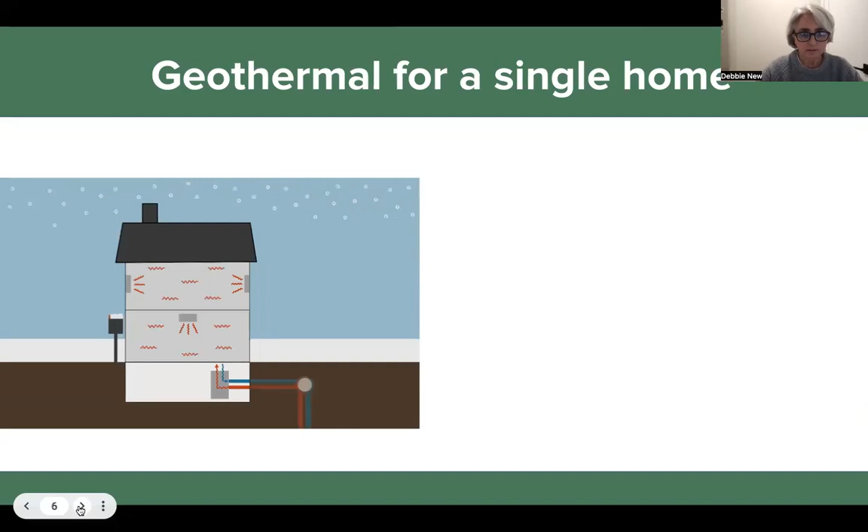When you turn on your heat, the ground source heat pump inside your house, that box in the basement, delivers warm air and extracts cold air like an air source heat pump. So there's the warm air inside the house that's coming up from underground. In the summer, the process reverses. So the heat pump delivers cooler air and extracts heat returning to the earth. All of this comes from underground at about the depth of a water well, where the Earth's temperature is a constant about 50 degrees.

So the water in vertical pipes underground absorbs that temperature and brings it up to your ground source heat pump in your basement, where it's concentrated into hot or cold air, depending on what's needed, and keeps you comfortable year round. Excess heat, meanwhile, is sent back underground where it's stored until it's needed. So it's heating, cooling, domestic hot water, and storage.

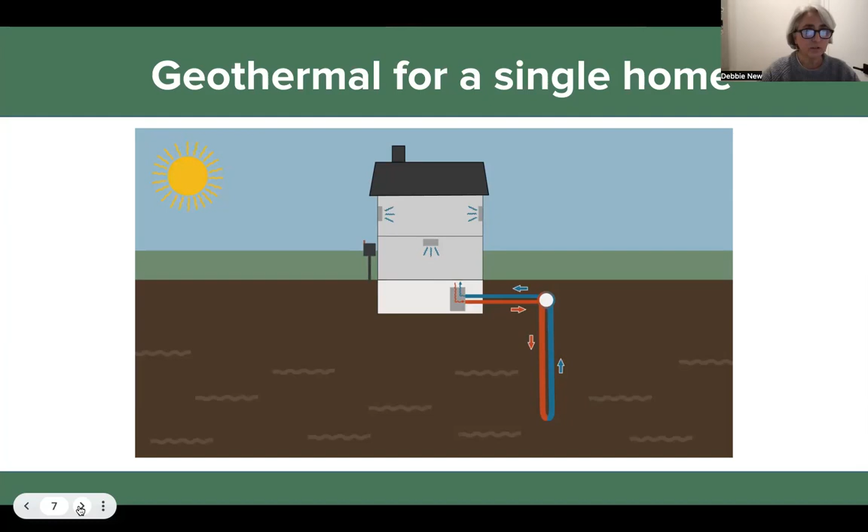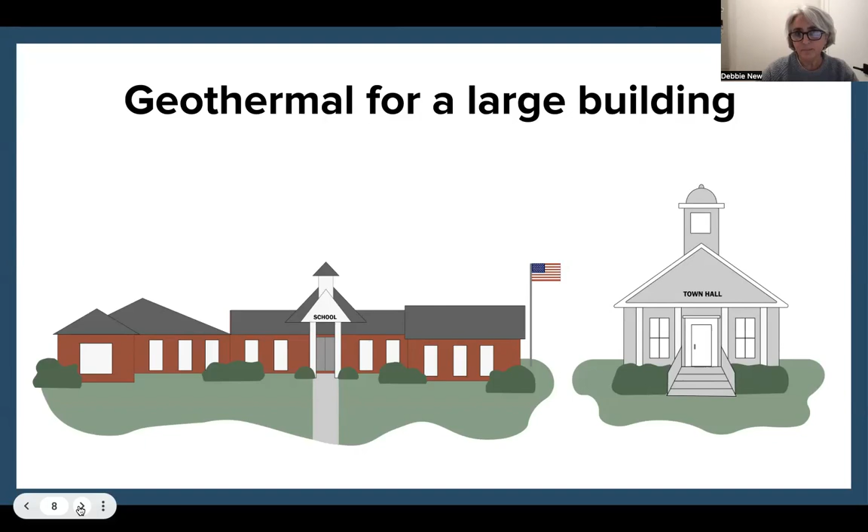Geothermal can also work well for larger buildings, especially because it's very reliable and low maintenance. Especially for municipal buildings like schools, town halls, libraries. It's a great solution. And it can be an anchor for building a network out from one building and spreading that to other buildings nearby. It's also an important alternative to biomass. So we can come back to that maybe around some questions about it.

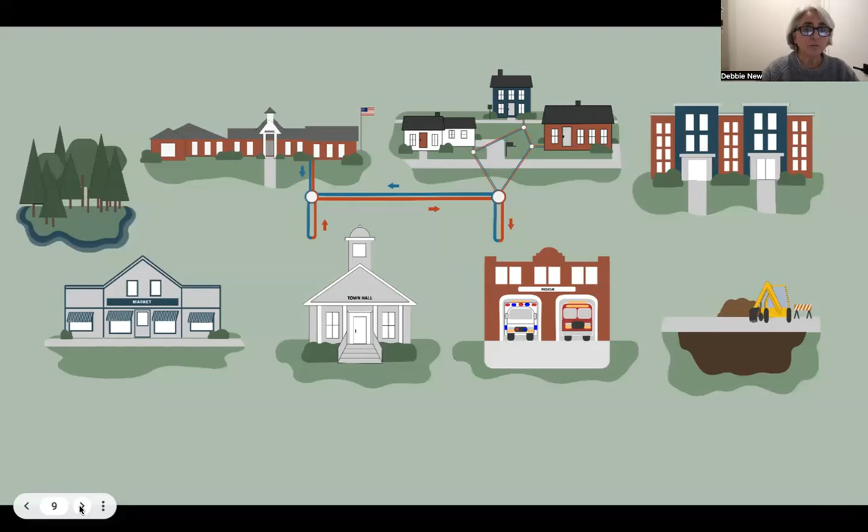A network system is even more efficient than geothermal for a single building. So buildings are connected to vertical bores, as I mentioned, and they're linked by horizontal pipes that form closed loops that exchange temperature with the earth and share it between buildings. So homes and large buildings and different kinds of facilities like the ones you see here, this is based on some buildings around Waitsfield, where my daughter who made this illustration grew up. So that's her elementary school.

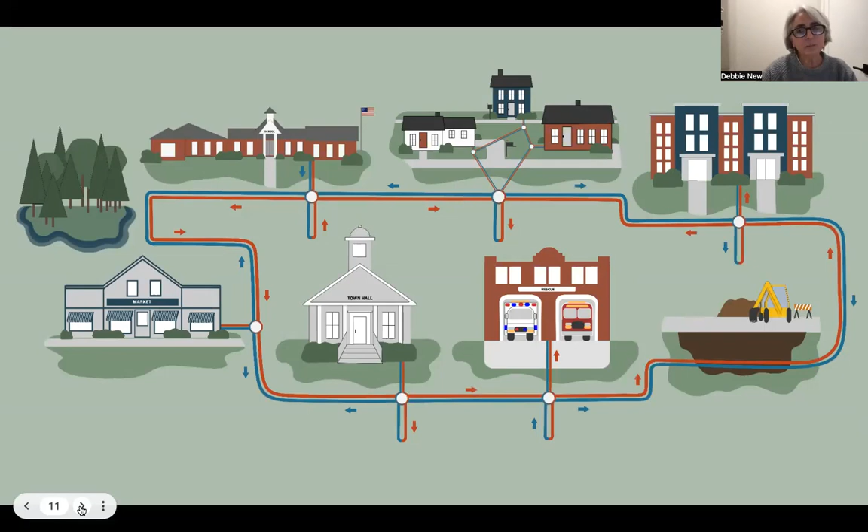So they often have different thermal needs at different times. So excess heating or cooling isn't wasted. It's not vented out of the buildings or flushed down the drain. It's shared efficiently between them. And these loops can grow over time, becoming even more affordable and more efficient as they grow. But it's important to mention that we don't have to do a network all at once. We can start small and build from there.

So this is one of my favorite parts of talking about this because there's a long list of benefits. And these are some of them. So I'm just going to run through this quickly. These networks, because they don't involve fossil fuels, are safe and clean. There's mainly water inside the pipes and nothing is burned. So there's no risk of explosions or toxic leaks. And the only emissions come from the electricity needed to run the pumps.

They're also affordable and reliable. Once installed, customer bills can be low and predictable year-round. And we'll talk later about affording that upfront cost and how even that can be spread out over time and over a community to make it actually doable. These systems are also healthy. As I said, nothing's burned inside, so the indoor air is safer to breathe.

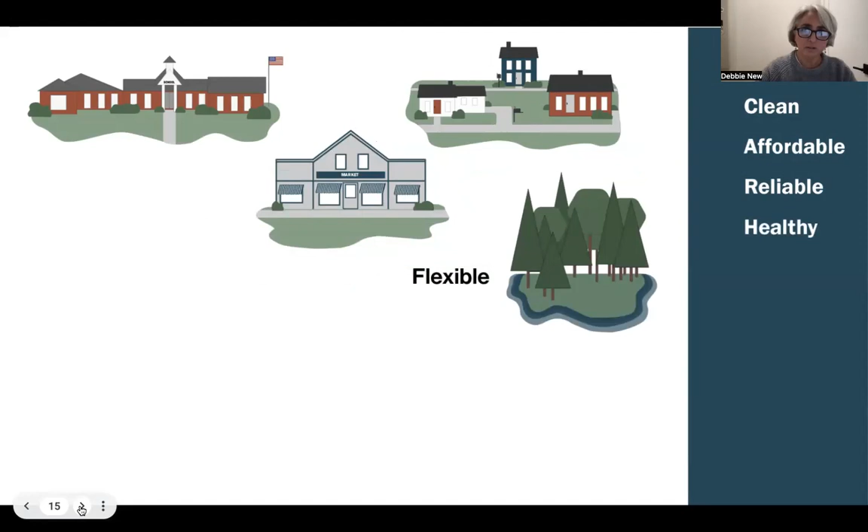And they're flexible, which is really important in Vermont because we live here because of the natural landscape. These systems can fit into that landscape in many locations with a minimal footprint. So the aesthetics of these systems is not such a big deal. They're also resilient and secure. The components are durable, long-lasting, and they're mainly underground or inside, so they're protected from a lot of different kinds of disruptions.

They're also equitable because these networks offer a community scale solution rather than an individual choice based on what people can afford or what they can access. And it's not house by house. So we can move faster to bring clean energy to more people across a neighborhood.

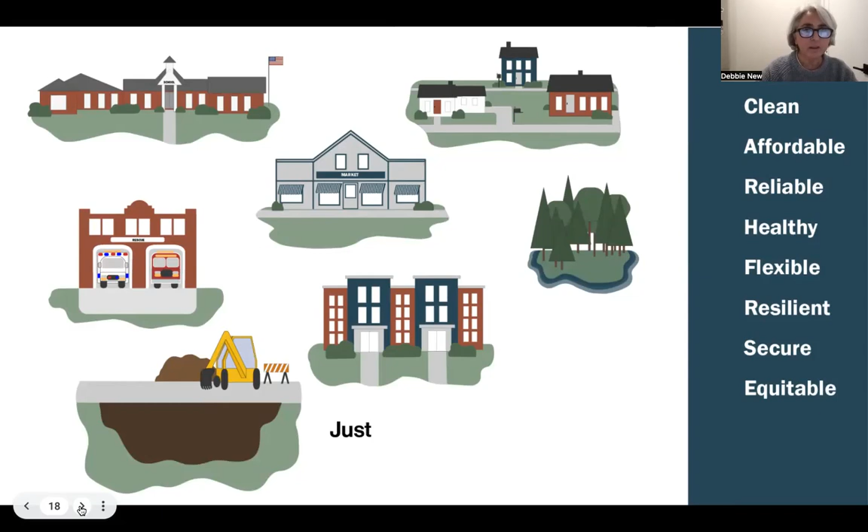They can also be part of a just transition because fossil fuel workers, whether they work on the gas system or they deliver oil and propane, they're plumbers and pipe fitters, and they understand pipes underground and delivering fuel. So they can use the skills they already have to install these systems. In fact, one of the national trainers who came to Vermont to work with the workforce at Vermont Gas Systems, really by training them, found that their skills were almost identical to what's needed to install a ground source heat pump loop.

And importantly, these are local systems. The energy comes from underground, under our feet, and around us in our communities. So we're not beholden to international energy markets and fluctuating prices, but it's right here, and it's a system that we can actually own and operate.

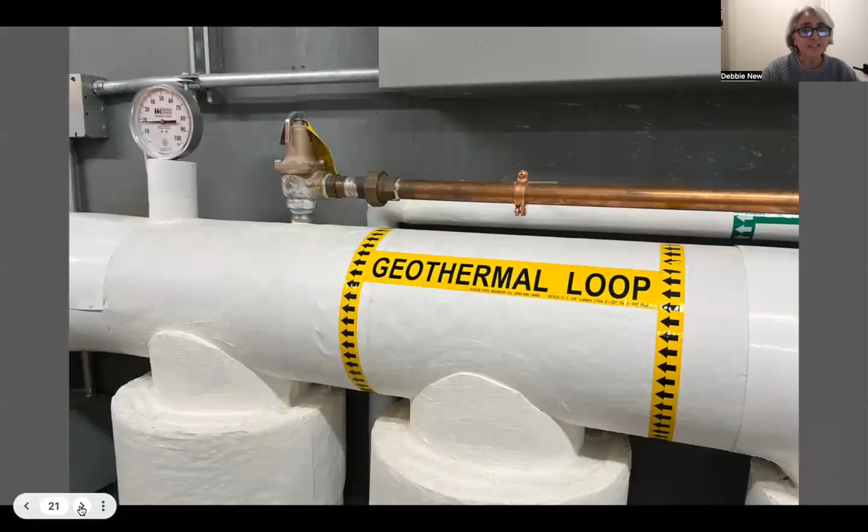So I want to show you some examples of what this looks like. This is a geothermal system up in Burlington at Hula Lakeside, and it's a larger system. It connects a couple of buildings. So this is a larger pipe than you might find in some places, but this is part of a geothermal loop.

So I also want to talk through some non-Vermont examples, because these systems have been operating for a bit longer and we've learned things about them that relate to what we need to know here. In Toronto, there is a new development that's been operating for about 2 years, of over 300 homes that are all connected through geothermal pipes. And they are expecting to reduce their emissions overall over time, once the whole thing is operational, by about 80%. 80% reduction in emissions.

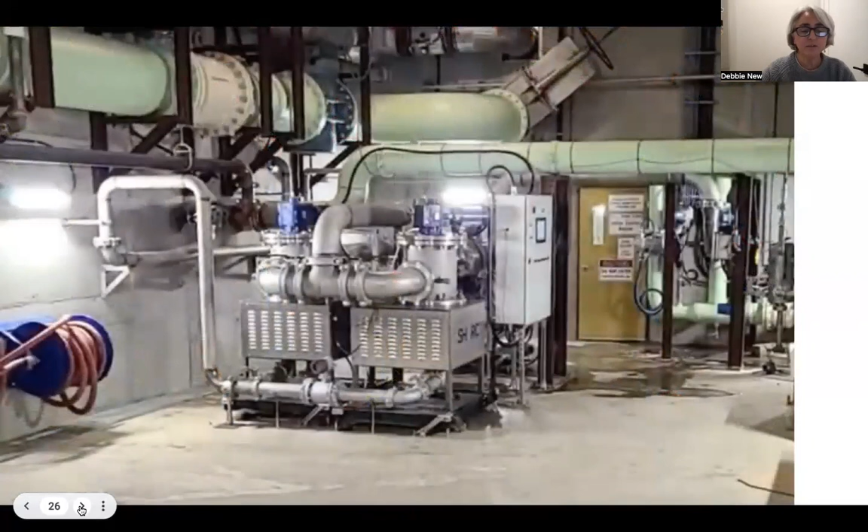An ice rink in Vancouver provides heat and hot water to nearby buildings, about the equivalent of 43 homes from one ice rink, by sharing heat that's removed during the freezing process to make the ice. And another neighborhood in Vancouver is cutting greenhouse gas emissions from buildings in half by recovering heat from a wastewater treatment plant. And this mechanism in the middle is what is extracting the heat from those wastewater light green pipes and delivering it to nearby facilities, nearby homes.

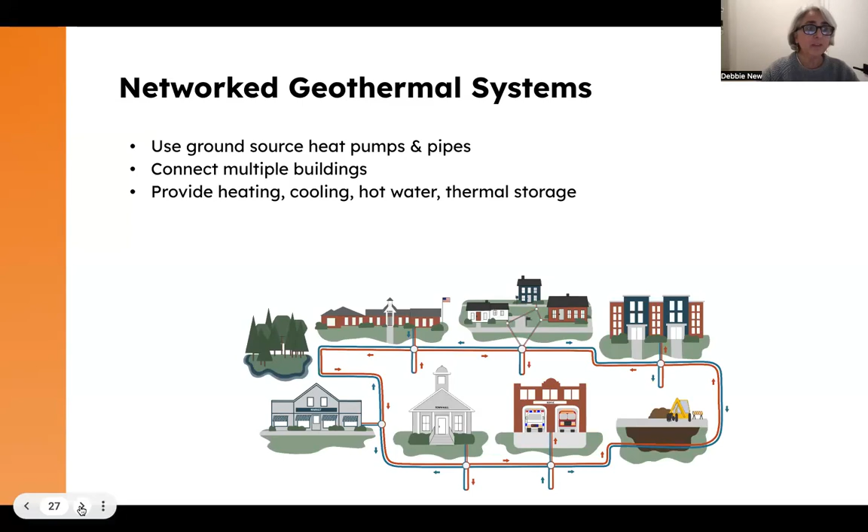So to recap, networked geothermal systems use ground source heat pumps and pipes to connect multiple buildings and provide heating, cooling, hot water, and thermal storage, importantly, for consistency. In addition, thermal energy networks do all of this, and they harness waste heat that already exists across a community, that's otherwise vented or lost, and that has already been generated and already paid for.

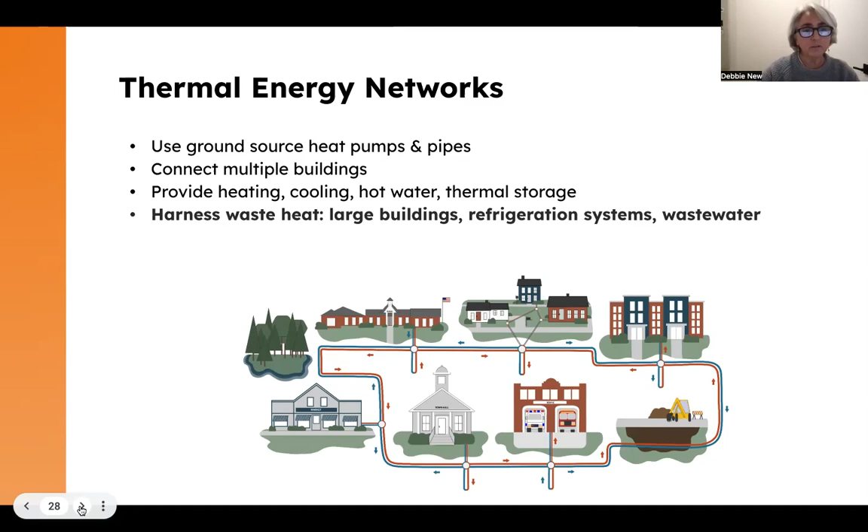So, for example, the waste heat from a large grocery store's refrigeration system can be reused to provide heat and hot water to about 15 to 30 homes. So combining geothermal with other thermal resources creates a stronger solution. And that's why I'm mainly talking about thermal energy networks and helping people understand that geothermal can be part of it, but really our goal is thermal energy networks of different kinds in different places.

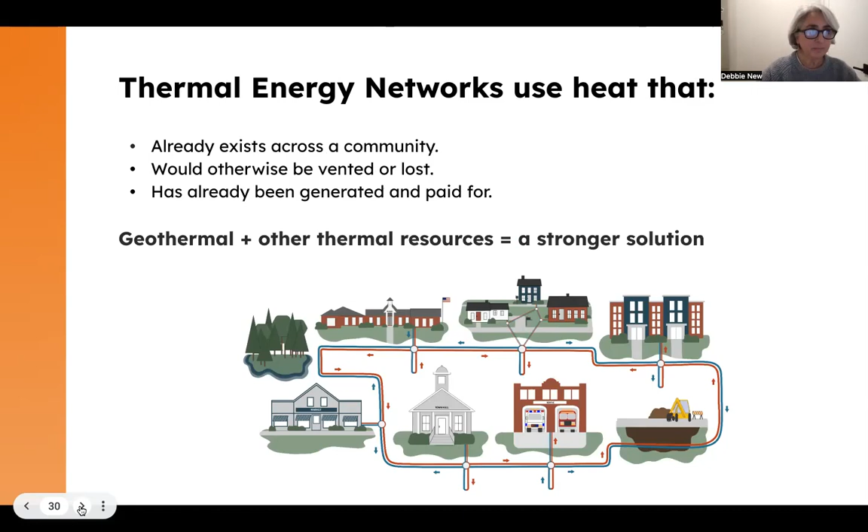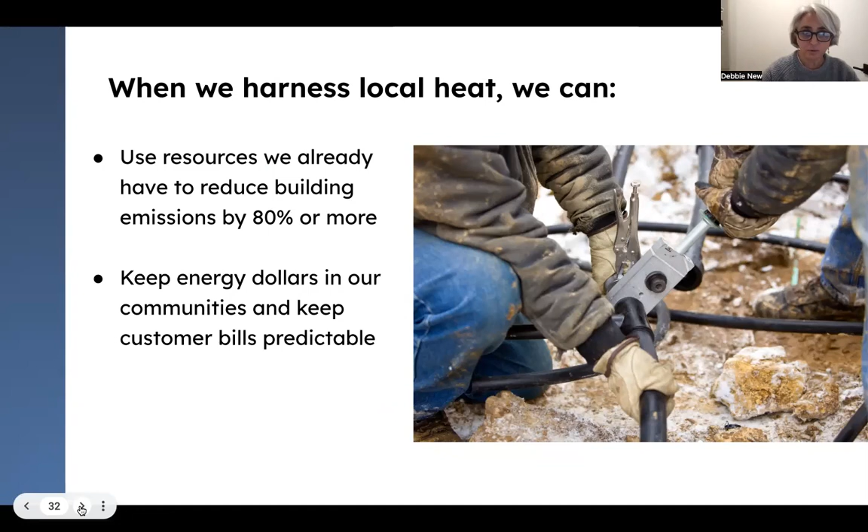So by building thermal energy networks in town centers where we have the density and proximity, and in new construction where it makes total sense, we are harnessing local heat and can use the resources we already have to reduce building emissions hugely, by approximately 80% or more. We can also keep energy dollars in our communities and keep customer bills predictable. And we can protect the electric grid as we accelerate the energy transition.

So because TENs are so efficient to operate, the ground source heat pumps are using more moderate temperatures to create heating and cooling than an air source heat pump does on the very hottest or the very coldest days. Because they operate more efficiently, regardless of outside temperatures, they use less electricity, and the components last longer than other kinds of heat pumps. 25 years or more for the ground source heat pump, and a loop, the underground pipes, can last 50 years or more.

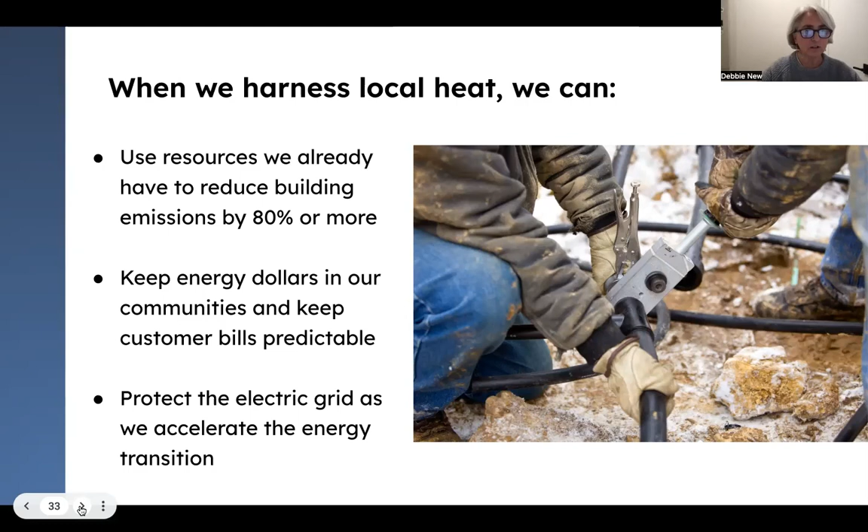So we can protect the electric grid by implementing this solution. We can decarbonize buildings without added grid load, making electrification go further, faster by reducing the demand from the thermal sector. So I want to emphasize this point, that thermal energy networks are a yes and solution. And what I mean by that is they're part of a portfolio of solutions that complement other clean energy solutions.

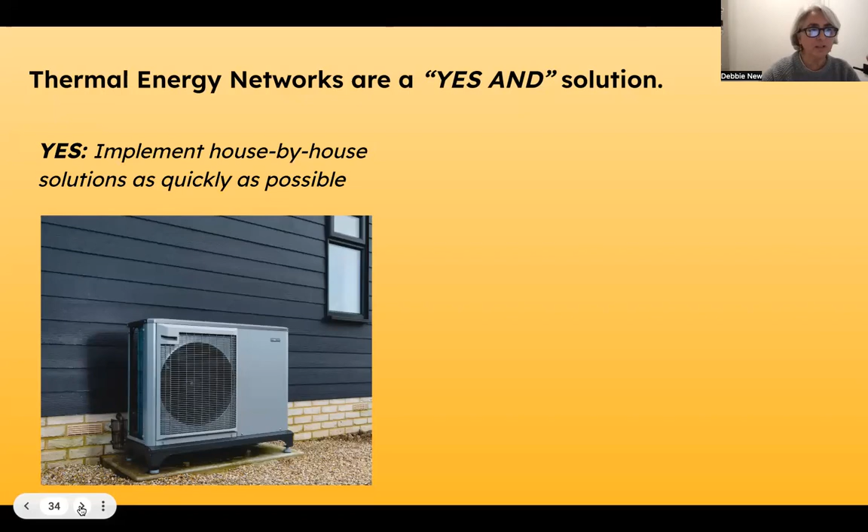So the yes part is that we need to implement house-by-house solutions like air source heat pumps as quickly as possible. We also can add thermal energy networks in new developments in town centers to help more people access and afford clean energy, and to add another way to heat and cool our homes, so mitigate risk by diversifying our thermal energy sources. And as I mentioned with the Texas development, we can pair systems with solar to supply local clean electricity needed to run the system, and it's essentially a mini grid.

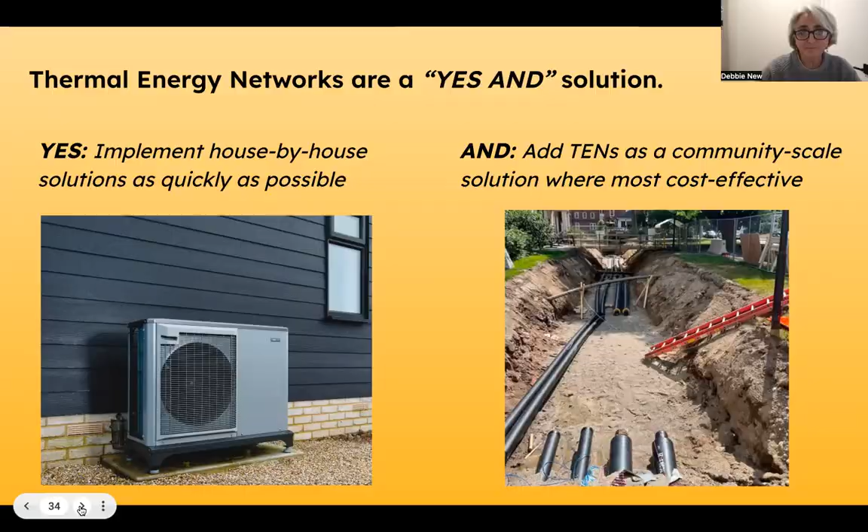So I have one more example for you, and this is from Colorado, where they're really moving forward with thermal energy networks. Colorado Mesa University was one of the first systems to really get going with networked geothermal, and they've been operating for over 12 years. And we have some really good data on what's going on there. So at this campus, they're heating and cooling 16 buildings and getting 90% of the energy required to operate their campus from this thermal network.

So let's come back to Vermont. I've recently talked with the director of a municipal utility, a water and electric department in a small Vermont town. And he knows Vermont. He's been around for a while, and he's identified 4 themes that he hears a lot, and he calls them myths.

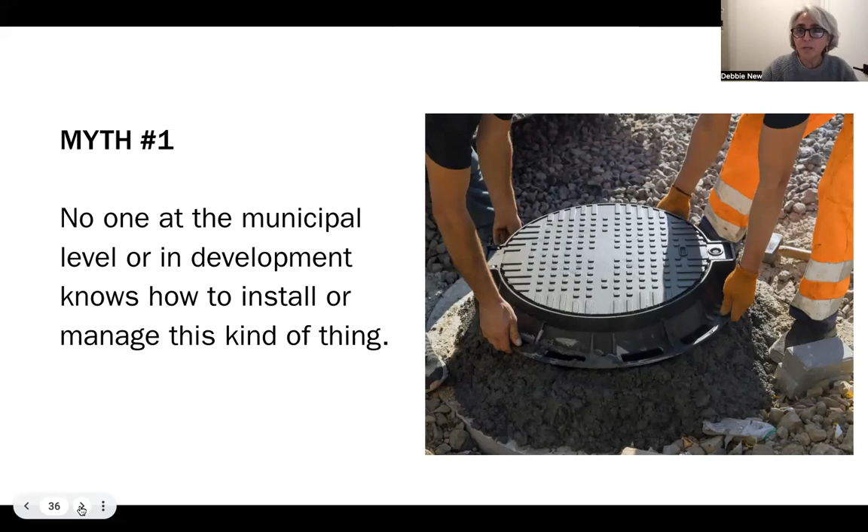So myth number 1, no one at the municipal level or in development knows how to install or manage this kind of thing. Well, actually, municipalities know how to lay pipes and manage energy flows. They know how to raise capital for larger projects and pay them back over time. So we already have a lot of what's needed. And the other point here is that thermal is actionable. It's within local and regional control, whereas the build out of the electric grid really is not in our hands, but we can harness and use local heat.

Myth number 2, thermal networks have to be big. Well, actually, they don't. They can be just 2 buildings sharing heat, like an ice arena near a high school, which is an actual project people are looking at in White River Junction, a hospital and adjacent senior housing complex, or a telecommunications facility next to a hotel.

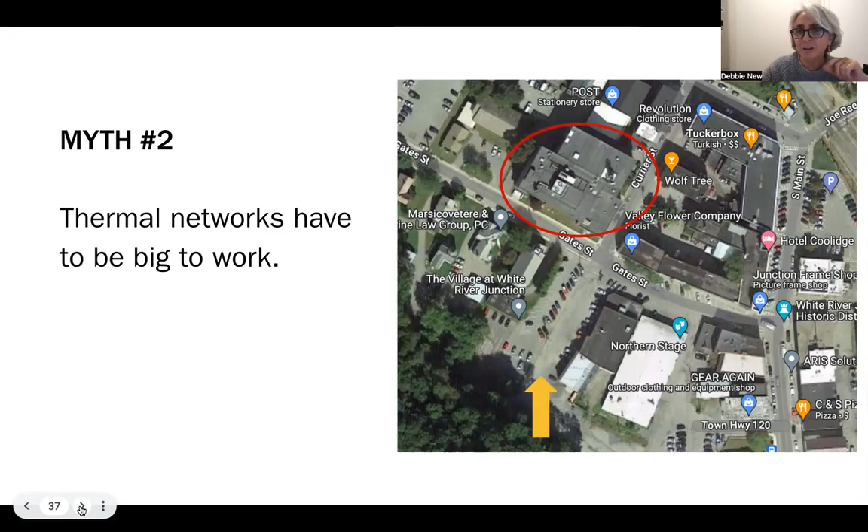And here is that telecommunications facility in a Vermont town. And if you start there and you connect it to the senior housing development that is across the street, that is occupying that parking lot that used to be there, and then you can add the theater and other buildings nearby over time.

Myth number 3, we can electrify everything. Well, I imagine people here are aware of the problems with that. In Vermont, some of the municipal utilities have told me that they will need to build the electric grid out 2.5 times the size it is now in order to meet the demands of electrifying everything. That's a big cost, and that's a big effort. Instead, we need to diversify our energy sources and use local heat where we can, so we can use electricity for what we really need to use it for.

Over the next 10 to 17 years, we need to eliminate the use of about 9 million gallons of oil and propane per year, which just gives more strength to our mission to get thermal energy networks in Vermont where they make sense and where we can get them built.

So what do we need to do in order to do this? Well, we need the workforce. Like all clean energy solutions, we need people to actually put them in. And that's a challenge in Vermont because you can't just have the workforce without being able to house people. So there are many layered issues there.

And we are talking with Vermont Technical Centers. We are talking with Vermont Technical College. And we are also working with other people who are highly focused on the workforce situation. So I'm only touching on that this evening. We could talk about that more. I'd like to talk more about financing and policy.

So financing, there are 2 main levels to this. On the federal level, as I imagine people here know, there are unprecedented levels of federal funding for clean energy. One thing about thermal energy networks is that we can maximize the Inflation Reduction Act. 30% tax incentives for these systems with a potential 10% more for domestic manufacture, which these systems mostly are. So then you can add on other things like low-income housing and other ways to harness the federal dollars.

So in Vermont, we can optimize the utility model. So we can have existing utilities and municipal and other utilities implement these systems because they can access the upfront capital and spread out the cost to recover it in rates over time. The Vermont Bond Bank and Vermont Economic Development Authority are part of our team. They're up to speed on this and they're ready for projects to create financing for it.

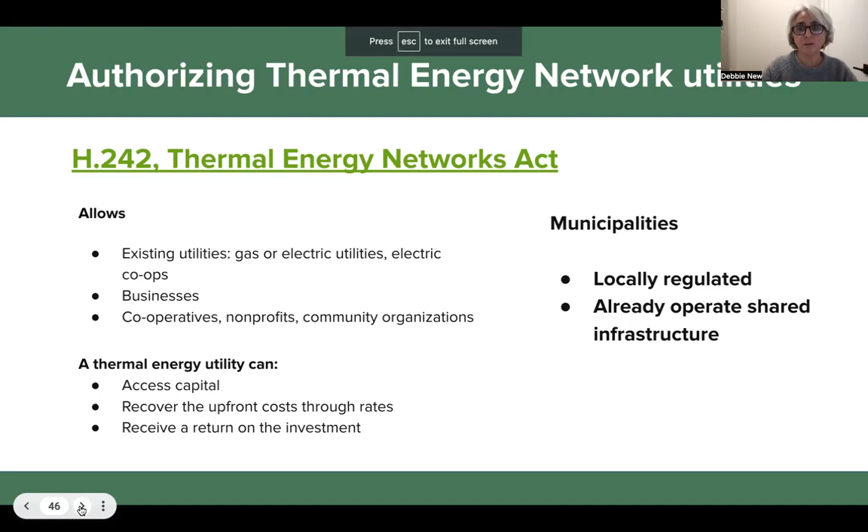Now, municipalities are treated differently in that bill, because municipalities are regulated locally already through the democratic process, and they already operate infrastructure locally. So municipalities are allowed to do this, but without having any kind of state oversight. So it really paves the way for municipalities to go ahead and implement thermal energy networks.

So I'll leave you with that, and I look forward to hearing your questions and comments both.